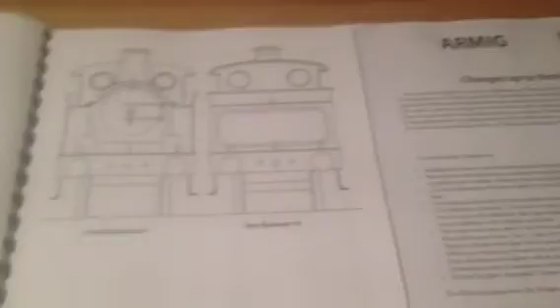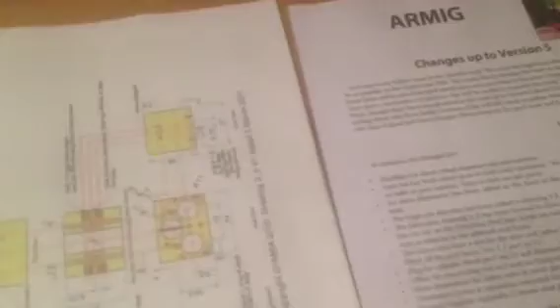And just a quick brief word on some problems that I found. The book I'm using is the edition version 5, which has various changes in it, but I have found some that aren't in there, and it might be worth me explaining some of them. Frames are alright. Find a couple.

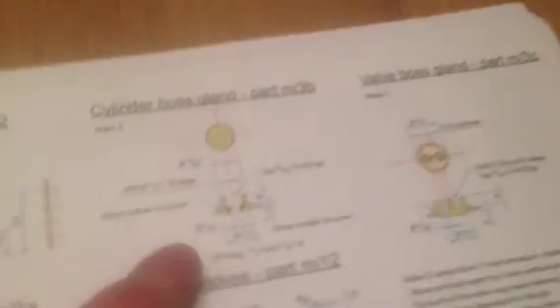The cylinders, I did find one problem, is the boss that fits into the rear here, that one, when it's in the back of the cylinder block, covers up the slot for the steam inlet on the rear end of the cylinder. I've heard other people mention this before, well, since I brought it up at the club, someone in the Yahoo group mentioned it. So that's one problem, in case you don't know.

The crank axle, I didn't find the easiest thing to make. It's not my first engine. I built a couple in 3.5 and a couple of Gauge 1 engines, but I didn't find it an easy thing to make because it didn't sit square, so I had to make a jig to get it square. It also mentions that it should use a 3/16 slot drill here. Well, 3/16 is 4.76, not 4.8.

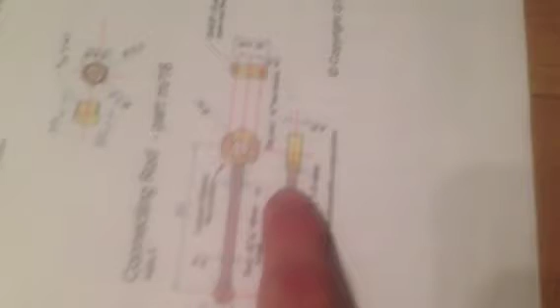The other problem that comes here is that the big end on the connecting rod is also 4.8. Now, size for size won't fit in the hole, so I would advise using a 5mm slot drill if you're making the crank axle yourself, because I've had to shave my big ends down to get them to fit inside the cranks. I've also made mine of bronze because I didn't think brass was good enough.

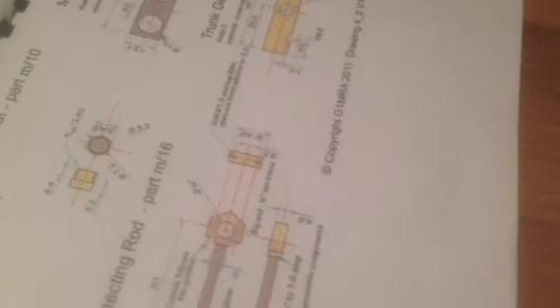The cylinder block's out of brass, but all my big ends and eccentric straps were from bronze. I made the eccentrics out of silver steel, not cast iron, and the straps out of bronze as a single ring rather than a split one. So that's about it for now.